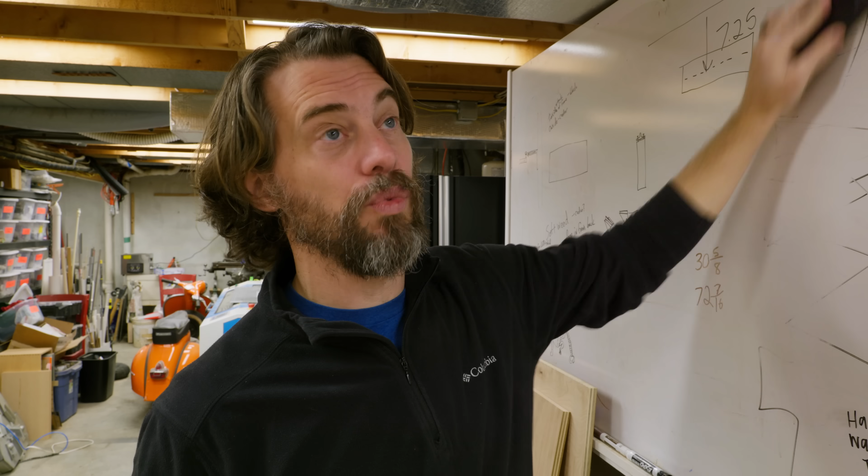For a couple of weeks now, I've been sketching some ideas for this project in my notebook, and I've got like 7 or 8 different things, ranging from really complex armatures that come over the back of the monitor to things that lift up from underneath, but I've narrowed it down to 2 that are pretty simple.

But quickly, I was thinking about something the other day. Every time I do a project video, you only see the last idea or 2. But there's usually a bunch more that lead up to that, and nobody ever sees them. So I think what I'm gonna do today is actually make a video going through the different ideas that I'm not gonna make, and just talk about why they're a good idea or why they're a bad idea.

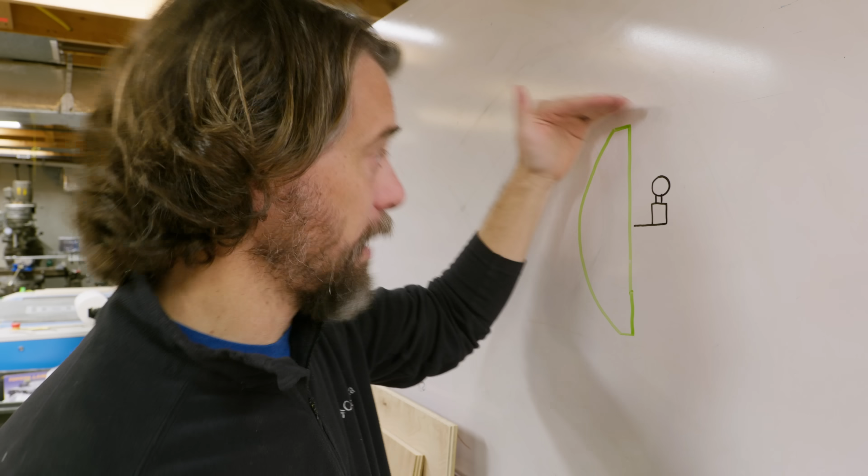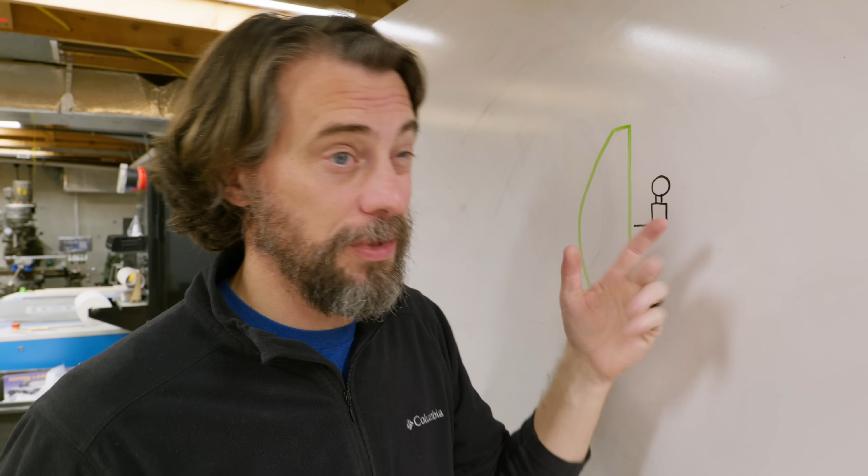It needs to be able to sit on top of the monitor and in the middle of it, but also be able to adjust a little bit. It needs to not scratch the monitor, so I've gotta put some sort of a separation in there to protect the screen. There's a cable that comes off the back of the camera, so I've gotta figure out how to manage that. And the camera's kind of heavy, so it's really gonna wanna lean forward on its own, and I've gotta work against that.

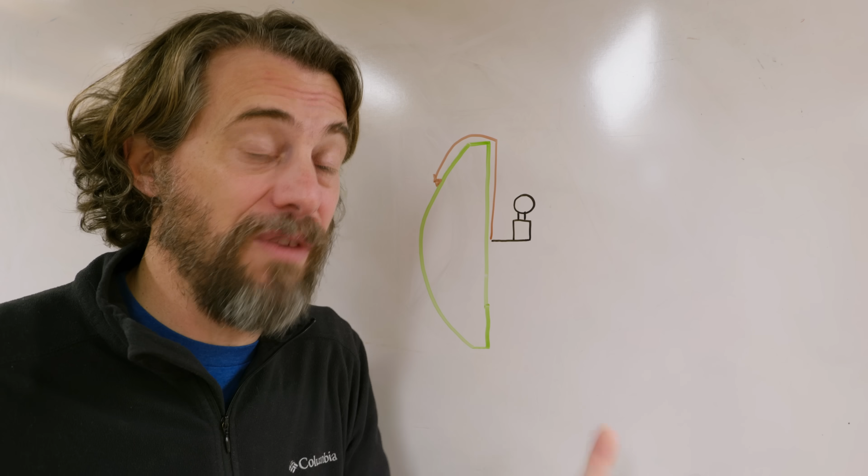Here are the 2 simplest ideas that I could come up with. And the first one uses fabric. I mean, if you put a piece of fabric connected right here, and then you drape it over and hook it on the back side, you can just kind of drop it down and have it hang from the fabric.

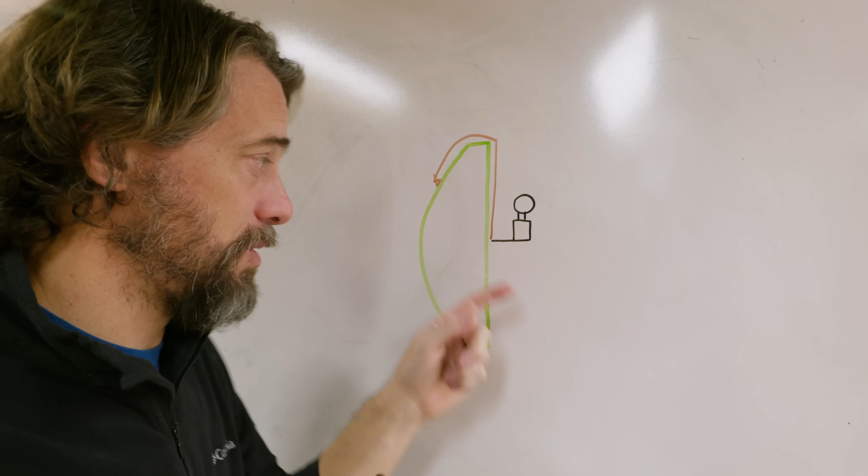Now the problem there is that that fabric has to be wide enough so the camera doesn't tip, and you have to be able to see through it so you don't miss out on a lot of the screen. You also have to be able to adjust it up and down, which means you have to be able to move it on the fabric or hook the fabric in different places across the top. That might be doable.

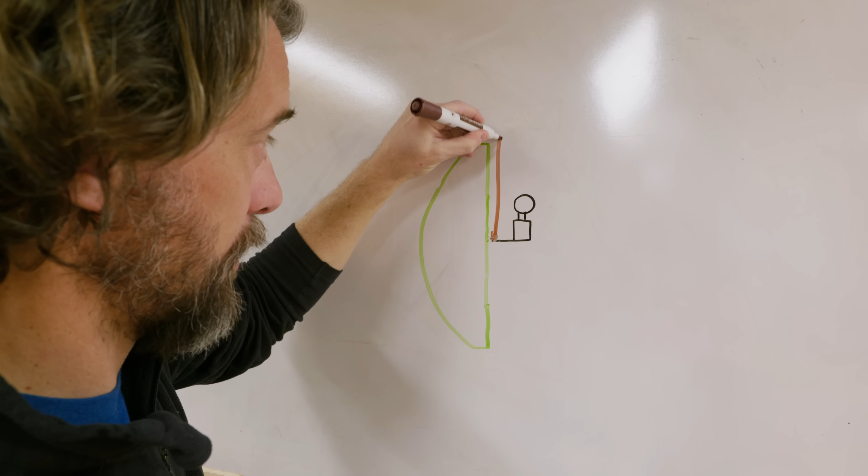And the other one is even simpler, honestly. If you put a pivot point right here, and then a fixed piece that goes up and has a built-in hook to hook over the top of the monitor, if you take it off the top and just drop it down, it's gonna hook itself in place.

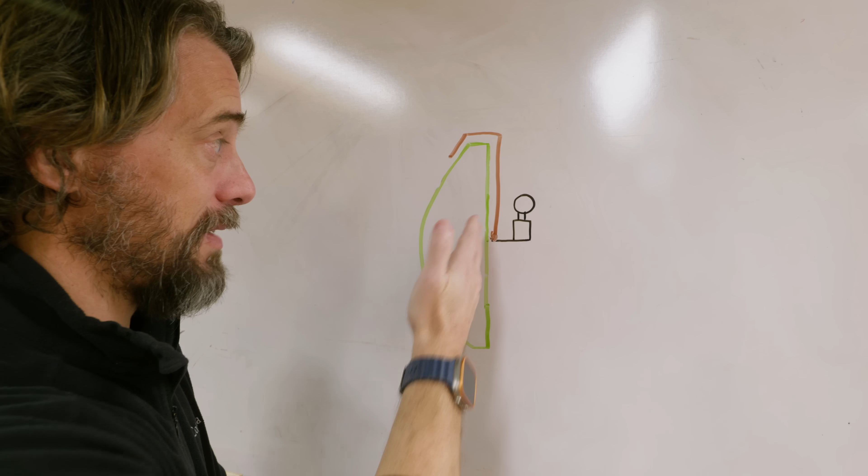Now the only problem here is that that doesn't allow the camera to move up and down a little bit, but I think we could probably engineer some sort of adjustment into that upright. I think we should start here.

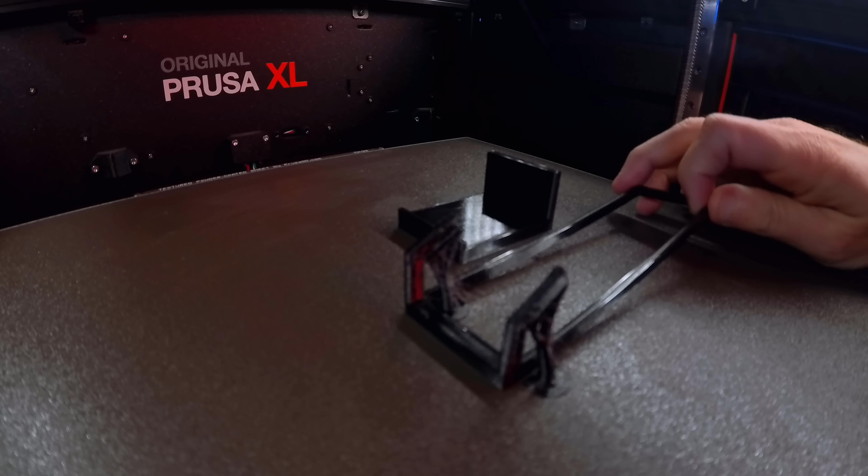The pieces from version 1 of the hook idea are off the printer, and I know that they're not gonna work, but I just needed to visualize something, and I've learned a couple of things already. First, the hook up here that goes on top of the monitor works perfectly, so I'm just gonna keep that. But then further down, the connection point between these 2 pieces, that's where I gotta figure some stuff out.

Now this little ledge here that the camera's gonna sit on is not deep enough for the camera, so I know I have to change that. I also don't know yet, and won't know yet, how long this foot needs to be to stop it from leaning over.

The biggest thing I don't know is how to connect these 2 pieces together in a way that's gonna last. As I was modeling these pieces, I intentionally did not model a hinge right here because I didn't think I needed it. I thought I could put a piece of fabric glued onto both of these surfaces and it would act as a hinge. And I think it will, but there's a problem.

From one perspective, this totally works because as you put this on top of the monitor, the hook will fall back. That's exactly what I want, but I think the problem is that when you put a bunch of weight out here and you've got fabric glued to 2 pieces of plastic, you're gonna run into issues.

So in version 2, I'm gonna make this thing longer and this thing longer and model in a hinge between the 2 pieces. That's pretty good, but I also need to figure out how to move this thing up and down on this arm so I can adjust where the camera goes. Haven't figured that out yet.

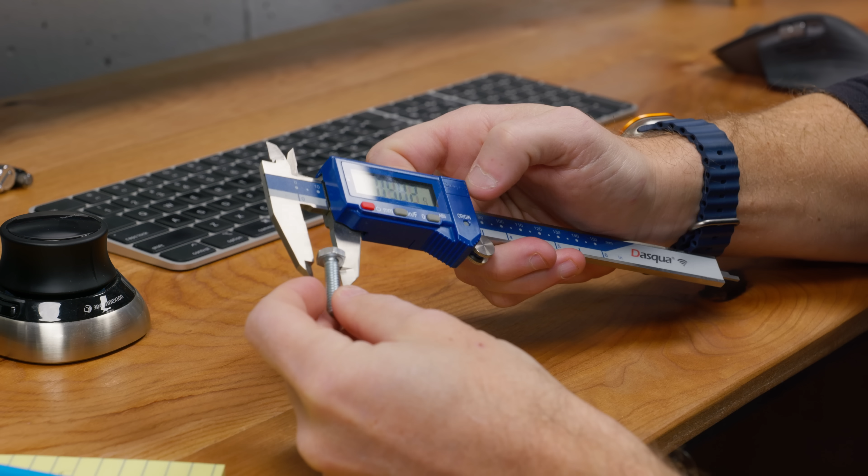Version 2 of the model is done-ish. It's got a hinge built into it, which is really cool, and that hinge is gonna work around this nail. So let's print it out, see if this works.

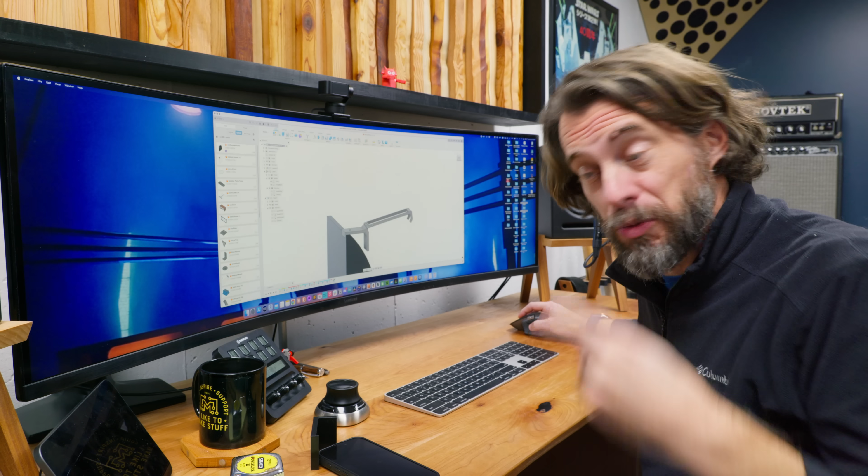Version 2 of the prints came out, and they actually don't fit together. I forgot to add any clearances into this, so while it looks like it will probably work, it doesn't actually go together like it's supposed to.

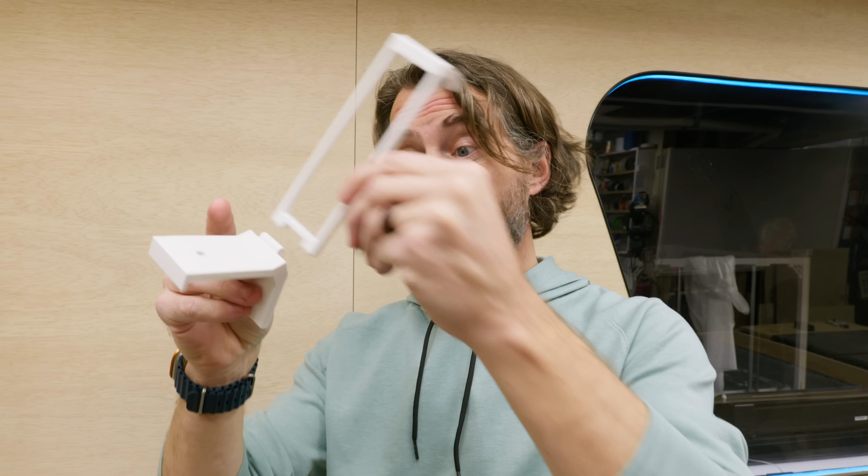So I took a bunch of measurements and made changes from this, and I printed this version. There were quite a few changes on this version, and these pieces fit together really nicely, and the hole for the pin works perfectly, and it hinges just like it's supposed to, but also, it's not gonna work at all.

So I had an idea on this, and I was just wrong. I just didn't know that it wouldn't work until I tried it. I was thinking that this foot would stop it from leaning forward, but that only works if this thing can't move as well. But since this is hinged at the bottom, it can just do that.

So from that, I learned that basically there can't be a hinge here. There's no way that this can work. And it also tells me that the whole fabric idea won't work for the exact same reason.

I almost threw this entire idea away, but I decided to sit down over lunch with a sketchbook and try to come up with another idea that didn't take advantage of a hinge. And I think I have something.

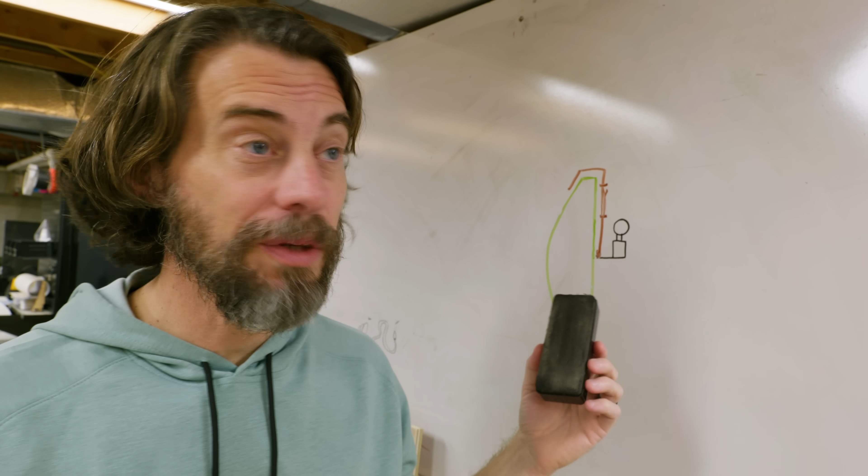This idea is a little bit more three-dimensional. I think it's gonna be harder for me to draw, so I may just have to model it. But the whole idea is that we have to remove the hinge.

We can still have the whole hook part slide up and down, and that's what we want to try to do here by making a slot that the camera mount can fit into, so it can slide up and down, but then also lock into different positions so that we can adjust the height of it, which is something I hadn't solved in the last version.

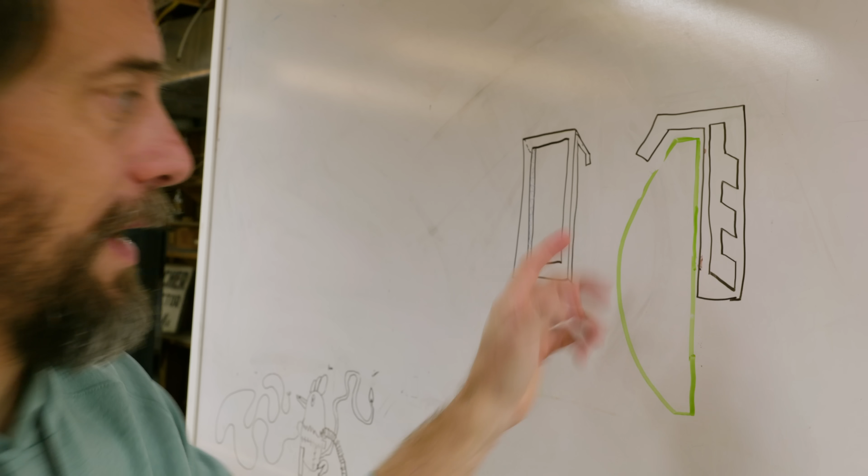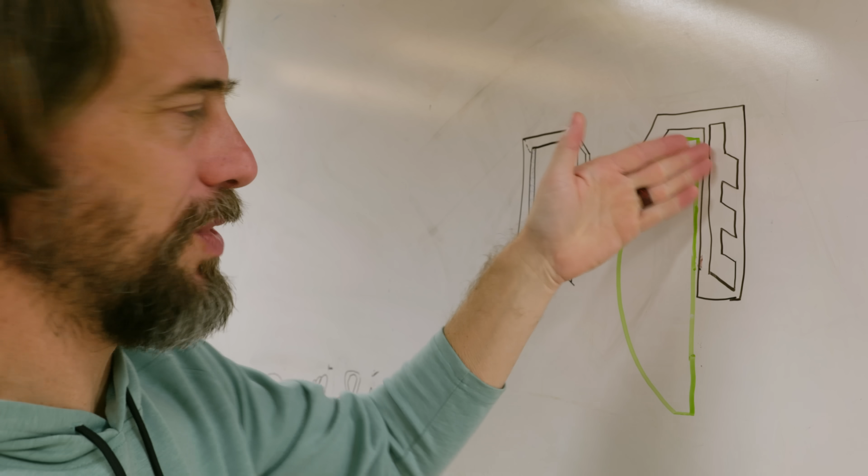As I'm thinking about it right now, each one of the side pieces of the hook that's hanging down is gonna have a cutout in it shaped kind of like that. And then the camera mount will be fit in the middle, in between those. As you lift it, you can slide it down into a groove to lock it into place. But then if you pull it to the back section, it can move up and down completely. I think I just have to model it.

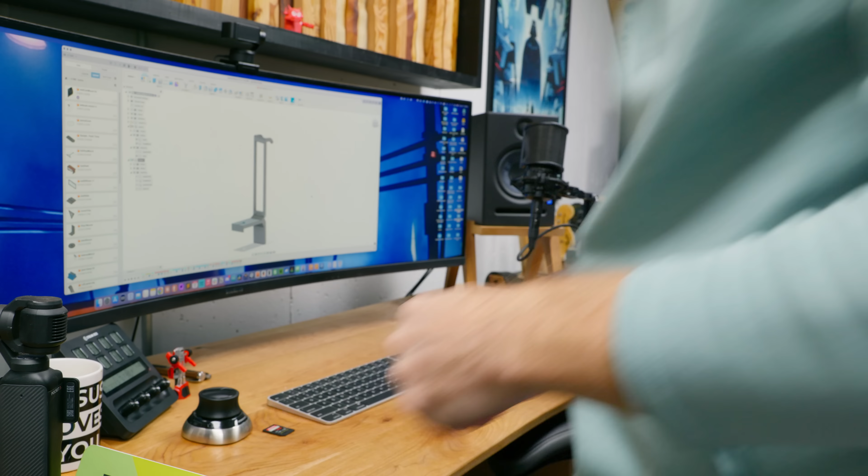There's a couple of pretty big advantages to doing it the way that I'm thinking, assuming it works. One, like I said, you can adjust it up and down. That's pretty great. But also there's gonna be a lot less surface touching the screen, which means fewer opportunities to scratch the screen and just fewer things in the way. Now the downside to this is that I have to make it in multiple pieces and assemble it together around the camera mount. Let's give it a shot.

So this idea is pretty cool. It hooks on the front of the monitor, and then you can take the little carriage that has a camera and slide it up to where you want, and it locks into that location. So that solves that problem.

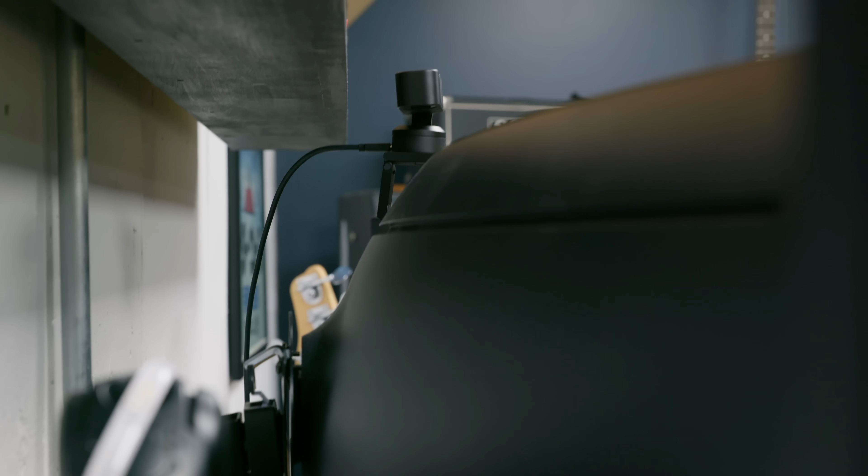Unfortunately, it also creates another problem that I have to show you at the computer. On the front of the monitor, this works great—you can hook it on and place it where you want, or drop it all the way down. But the problem is when you try to put it behind the monitor, it doesn't really fit. One issue with this monitor in particular is it's got a curve this way, but the back profile also has a curve kind of like that. That means these two pieces need to be able to hinge apart, like version 1, so this part can swing back out of the way to make room on the back of the monitor. And this doesn't do that.

The cool thing is, at this point, through all the different iterations, I think I've solved all the problems in different ways—I've just got to put them all together. I do think I know how to do it, but it's here, and I need it to be there. While I'm in the other room actually modeling this, I can also be in here telling you how it's gonna work, so you don't have to watch me model.

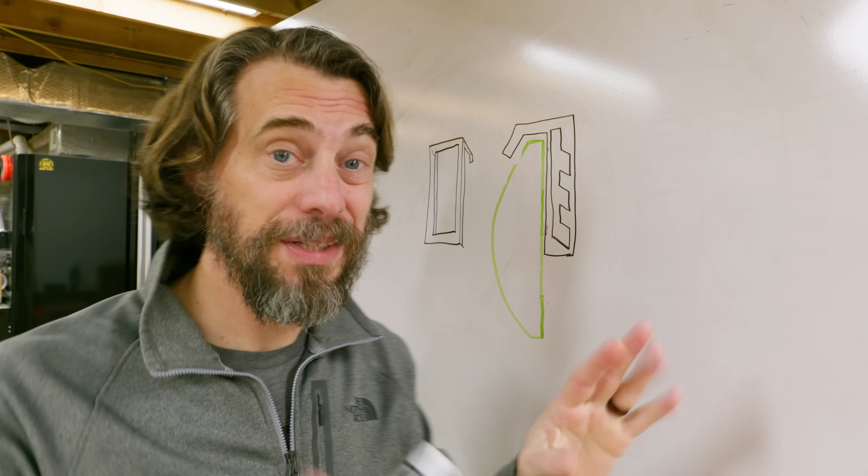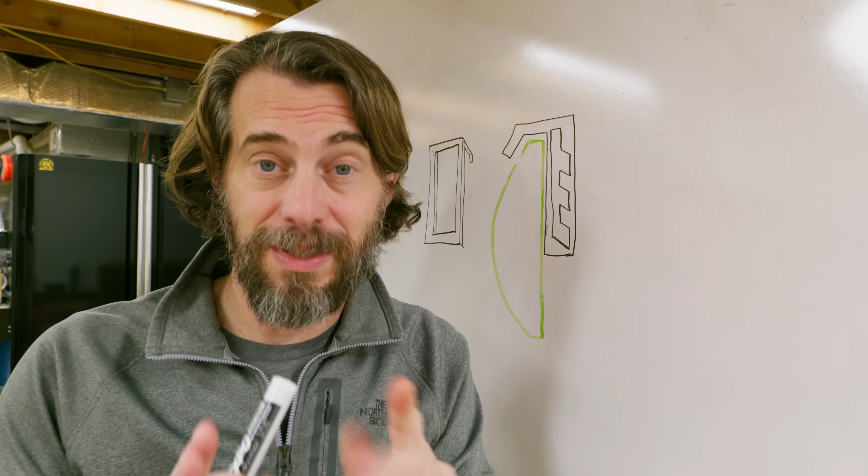Basically, the cool thing about this old idea was that there was a slot, so the plate that holds the camera can move up and down. But there's also these little grooves that help it lock into different positions. We can use both of those things, but separate them out so they're not in the same space.

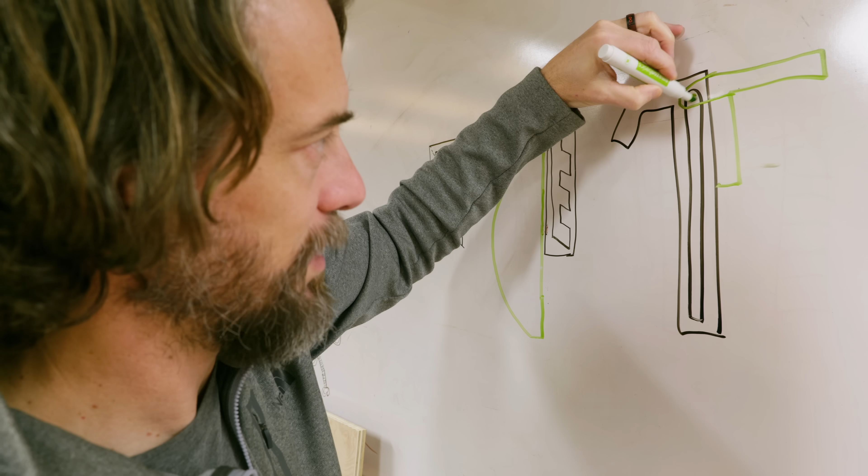So the new idea is to have a very similar kind of hook that's gonna go over it, but this time it's got a slot down the middle. Then we have the plate that holds the camera, and it'll sit out here, but it'll also have a little wing that goes over—it has a pin that goes through that slot. So these two pieces can slide up and down, but they can also pivot away from each other on that pin.

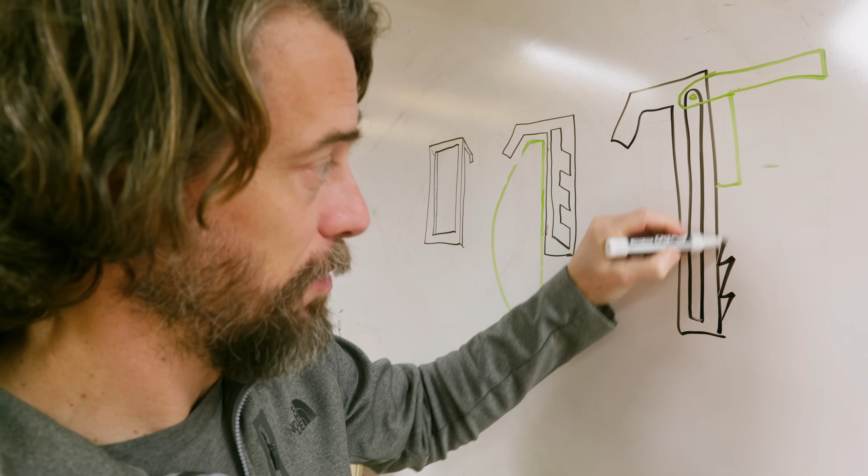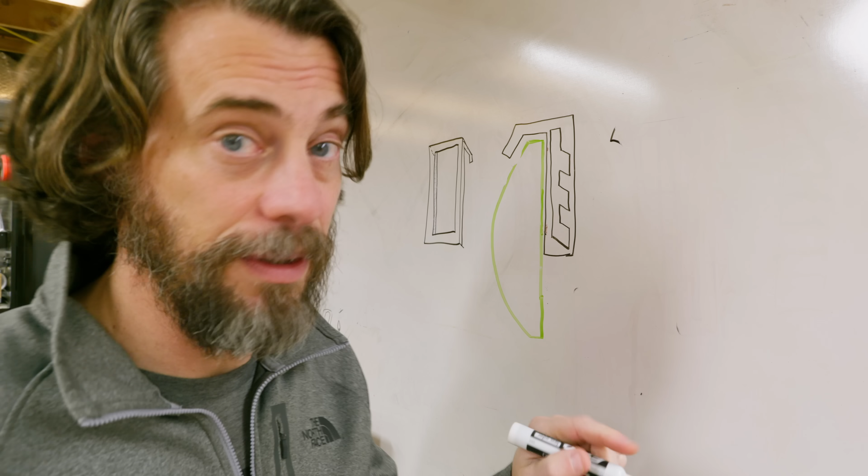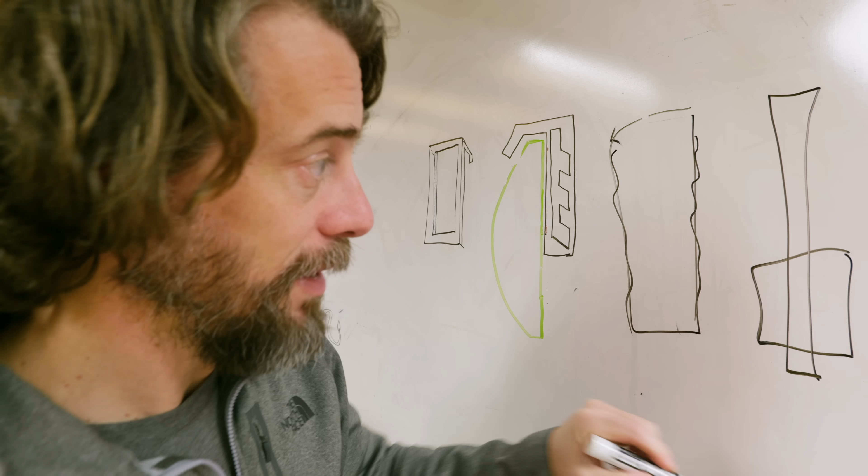But then what about the whole pivot problem we had in the beginning? Well, we fixed that by putting notches on the front of this piece, and then a little key on the bottom of the camera mount that fits into the notches. That probably doesn't actually help explain it any, but there's another key piece that's a lot different than the old one. The old one was a box, right? There was this little panel on both sides, and then the mount went in between them. But this new version is actually the camera mount with a center spine that goes up through the middle of it, and that's how those two things are bound together.

Either way, that probably still didn't help, so I'm just going to print it out and show it to you.

The pieces for what I hope is the final design are off the printer, and all three of these pieces go together with no glue. In fact, they only use pins or nails to fit together, and I'm pretty excited to see if that's actually going to work.

Since you only saw a terrible drawing of them before, let me show you what each piece is. This is what I'm calling the hook, because it's got a hook on the top, but it's got a slot that runs all the way down through it, and then grooves on the front for the plate to fit into. And this is the plate.

It's the same camera plate I showed you before, but it's got a couple of things added to it. One, it's got some tabs on the back so it can go through the slot on the hook. It's got the little thing on the bottom that will go into the notches, and then it's also got an extra thing on the bottom for a hinge.

And that's going to hinge to this piece. It's going to act as a way to lock the entire thing against the back of the monitor so it doesn't fall off. Let's put it together and see if it works.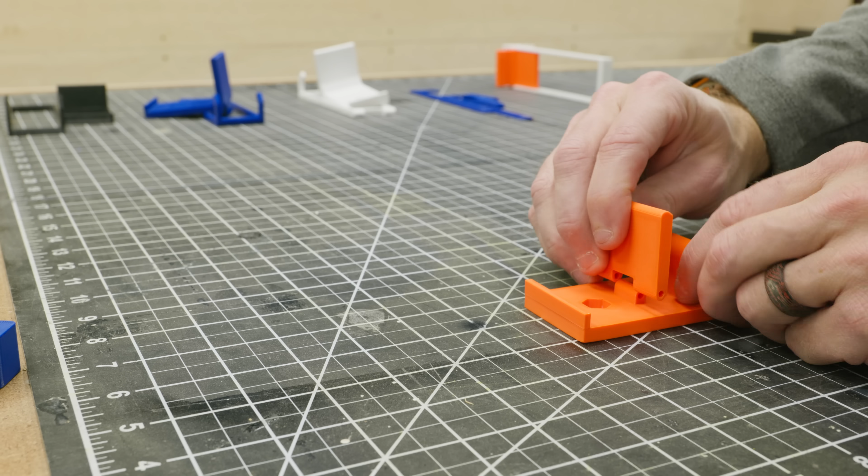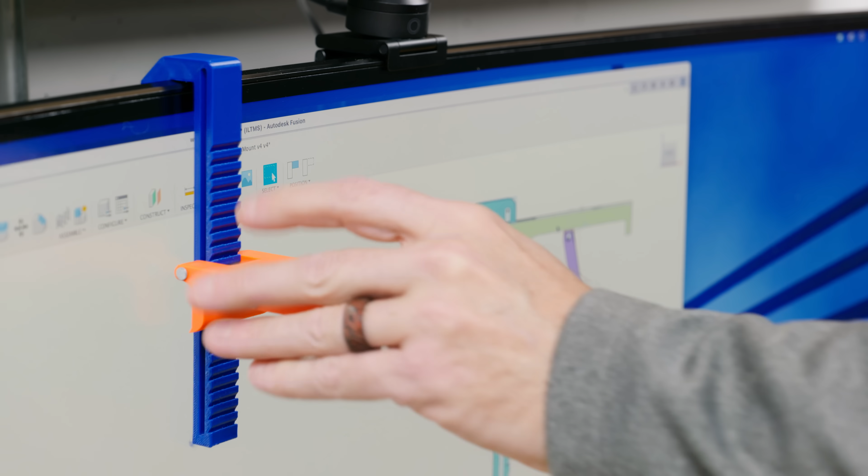Okay, let's see how this works. All right, first off, we can adjust the placement of it, which is really cool, very easy to do. And then when we go to take it off, just lift it up, flip down the little arm, and it hooks on the back just like that.

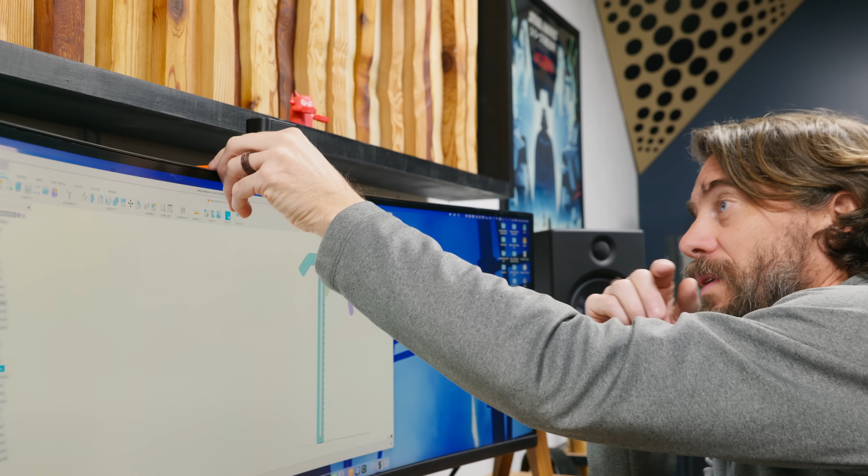It's totally doing everything I needed it to do, but there's a little bit of slop in all the different motions. Like this could be a little bit tighter. The whole thing should be a little bit wider so it doesn't slide back and forth.

And the biggest thing is that this front piece of the hook is too thin. What I'm finding is that this front piece right here is really thin because of all the little notches, which means it bends when you put pressure on it, a lot more than the back is willing to bend. So I think I can just thicken that up.

But other than that, I just have a little extra room up here that allows it to slide around. I think this whole thing could be a little bit wider so it doesn't do this. It's really close, and since all the changes are very small, I'm just going to fix them and reprint it in black so you don't really see it, and then we'll put the camera on and make sure everything is good.

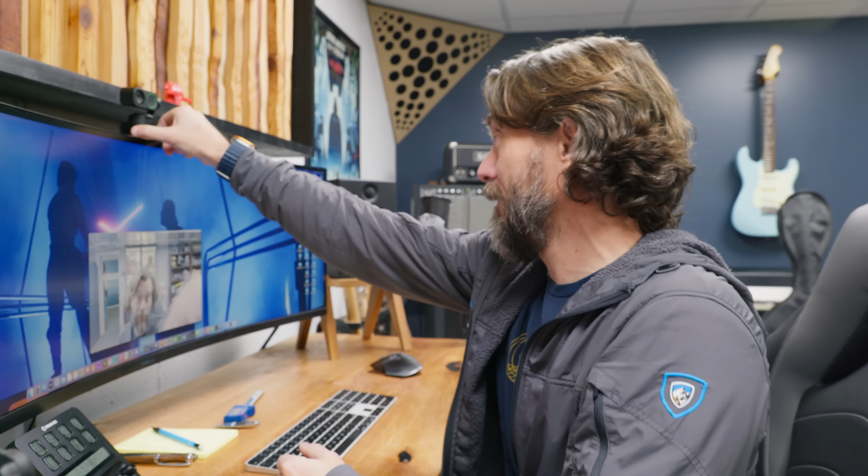Check that out, it totally works. And it actually fits really well, and you can't tell it's there until you go to switch the camera from this to this, which is exactly what I wanted, to be able to talk to a camera straight at eye level. It's going to be awesome for doing podcasts and all sorts of other stuff.

This thing works great, but one of the things I like most about it is that it's the collection of a bunch of individual solutions from each one of the failed prototypes. They all came together and made one thing that works super well.

Now usually when I do these problem-solving videos, the files I end up with to print the thing, I'm not super confident in them. They work, but I don't really want to give them to anybody else because they're not perfect. But this one, although not perfect, I think it works well enough that other people can use it.